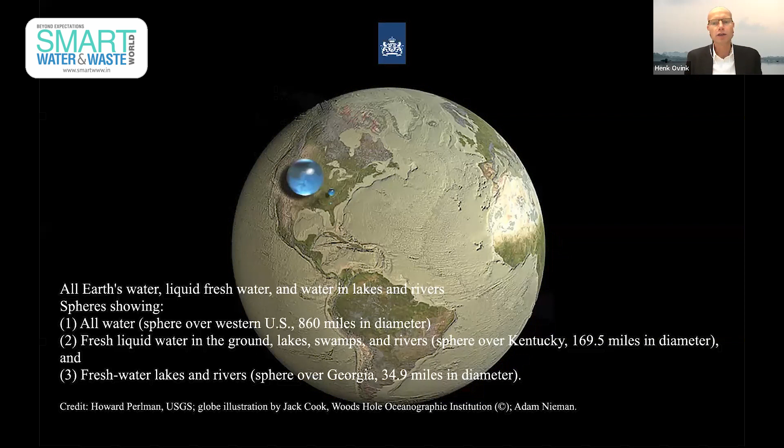Now, water relates to the challenges we face, from disasters—floods, droughts, wildfires—leading to migration patterns that are only increasing across the world. 2019, last year, again, was a year of these disaster events, and we will see more of these examples in the coming years. And in the current pandemic, this is a scheme just taken now, an image of the world where we are. Water is critically important too. Don't we all say, wash your hands?

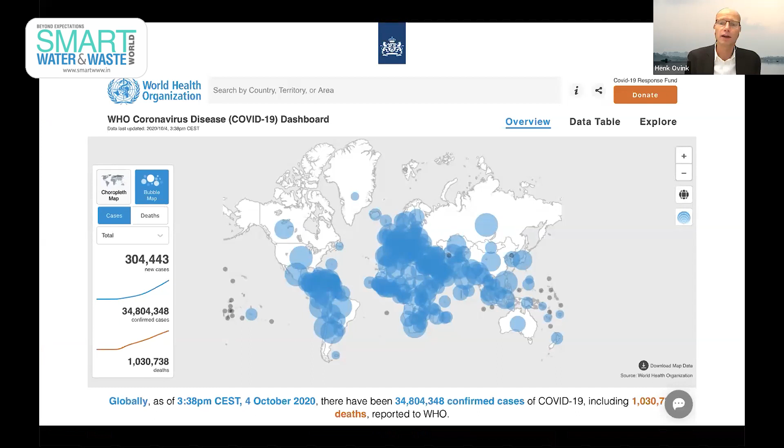Well, for 2.3 billion people in the world, washing your hands because there is no access to safe water is a way out of reach. So health and challenges are all connected to water.

And of course, with water, we think about floods and droughts happening across the world, but only impacting the places that are most vulnerable, and the most vulnerable people in the most vulnerable places hardest. Floods and droughts occur around the world, but the impact on humans is very much concentrated.

So looking ahead at the challenges we face, we only will see an increase. And that means that we have to reinvent ourselves and how we deal with that uncertain future. We can't replicate the mistakes of the past. We have to reinvent that future. Business cases of the past present us with more vulnerability and less sustainability.

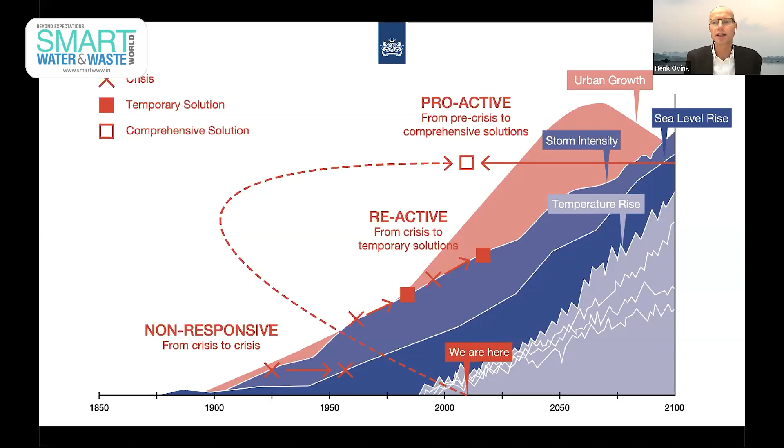And this is why 5 years ago, we agreed upon the Sustainable Development Goals, 17 goals that as a holistic, comprehensive, and connected agenda will help us drive the change we need. We agreed on the Paris Agreement to mitigate climate change and adapt to its challenges, to be able to tackle future challenges - not non-responsive, moving from crisis to crisis, not reactive, fixing with band-aid solutions temporarily, but proactive, like in this conference, finding novel solutions to future challenges by partnering and looking ahead. And water can be a great enabler for those future opportunities.

It is to water that all our challenges are connected. If we look at the Sustainable Development Goals, you'll find a relationship with water in each and every one of those goals. Women and kids that walk the wells - if there is no good drinking water available, health costs go up, mitigating climate risk with heat, nature-based solutions, or preventing floods, affordable and clean energy because of water, and of course food security, and so forth.

So water is connected and therefore an enabler for delivering on the Sustainable Development Goals. But to be able to do that, we have to understand that complexity. And if we understand that complexity, we have to value water across its relationships with all these SDGs. And based on that understanding and a more comprehensive and inclusive way of valuing, we can manage water better at our community scale, at the scale of our cities, our river basins, countries, and transboundary.

But for that, we need to look ahead. We need a research, planning, and design agenda that looks long-term, sustainably, and comprehensively at the future, being connected to short-term and better innovative projects and interventions. So the plan needs projects as much as the projects need the plan. And to be able to do this well, you need collaboration of all partners, public and private, institutional and informal, in a very transparent and accountable way.

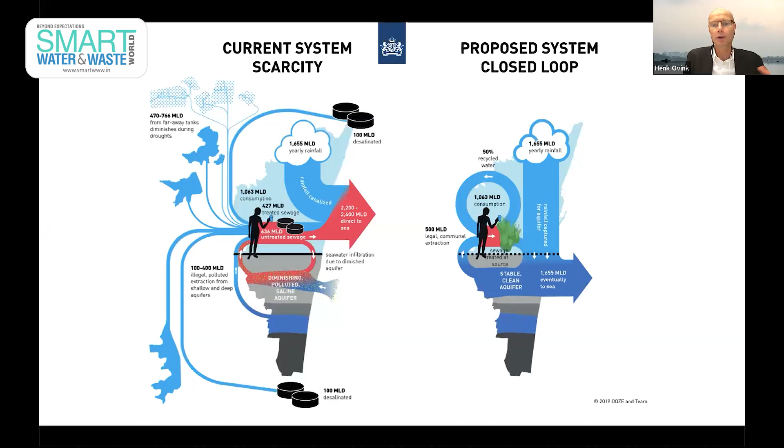We do this Water as Leverage program across Asia - Chennai, of course, as a best example - where we try to change the current water system into a holistic and circular approach that will deliver not only water for all its consumers and businesses, but also restore with nature-based solutions the natural capacity of our aquifers and help clean the water so we don't pollute our rivers and our oceans.

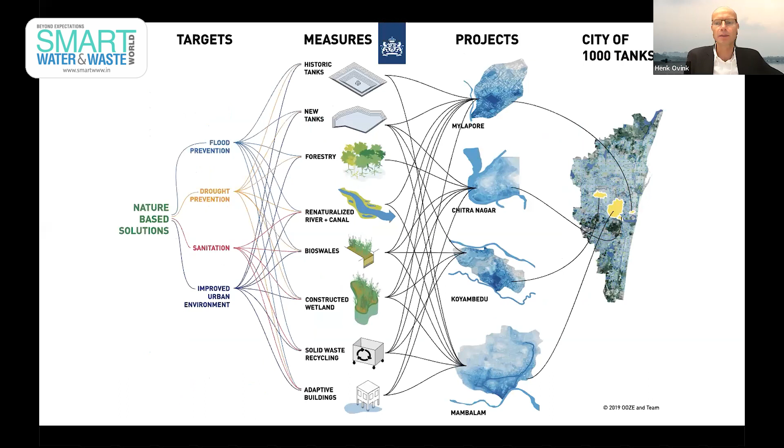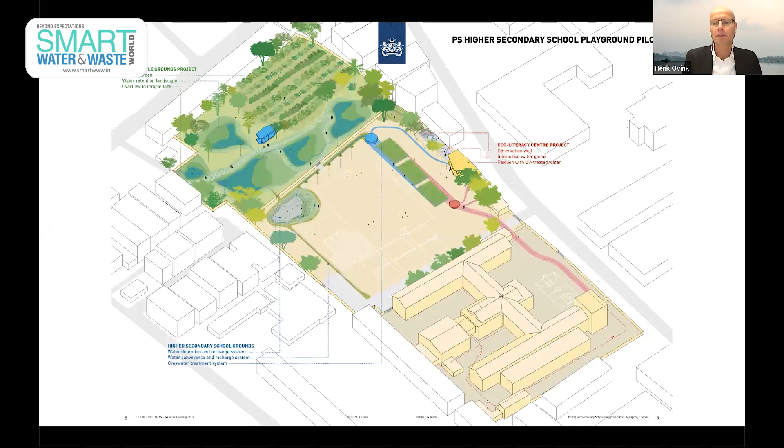Nature-based solutions at all scale in the city of Chennai drive resiliency and climate mitigation, and have the opportunity - not only because they tick all the boxes of the Sustainable Development Goals, but also because we can pilot them from the very small scale up - to drive the city's resiliency with water as a leverage from the bottom up.

We start with a pilot, we scale it up with schools in Chennai, then across India. We do it on the neighborhood scale and then scale it up across Tamil Nadu. It's this replication and scaling up capacity of water as leverage in Chennai that we can bring to India and then to the world to help us deliver on the promise we made with the Sustainable Development Goals and the Paris Agreement. Water as leverage is an innovative approach.

It improves the resiliency of our cities and their communities. It integrates an inclusive process by combining policy, engineering, creativity, and local knowledge. And participating from the start, we're all partners to help us develop partnerships, collaborations that see these projects through all the way to maintenance and operation.

In Chennai, it aligned with our national, bilateral, and global policies, with the Swachh Bharat Clean India mission, with the Jal Shakti Abhiyan, Jal Jeevan mission, with the UN Sustainable Development Goals, and with the Memorandum of Understanding between India and the Netherlands. In collaboration and cooperation with local governments and communities, partnerships like 100 Resilient Cities, the Dutch ministries, the Dutch Enterprise Agency, and international partners from financial institutions to help us deliver on this promise.

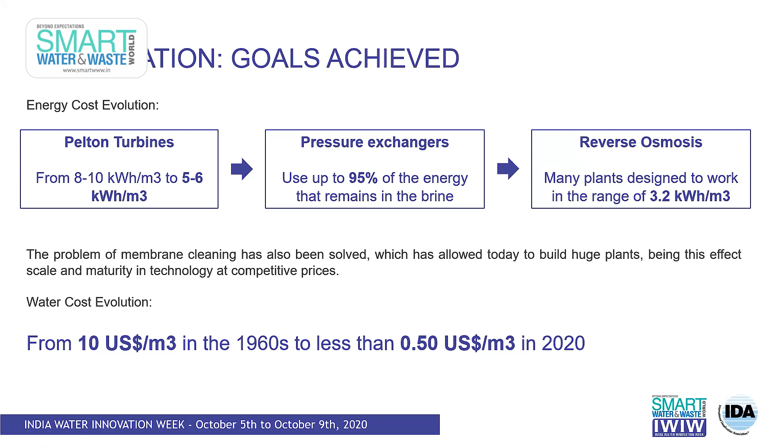We can say that we have practically reduced costs from $10 per cubic meter a day in the 60s to less than $1 nowadays. In fact, we have some record tariffs in complete BOT projects in the Middle East giving us prices lower than $0.50 per cubic meter. So I think desalination has really demonstrated that it is now a commodity, giving very good comfort to the majority of users.

There are more than 21,000 installations worldwide. Total capex invested in 2020 is around 16 billion dollars, with a record capacity in 2020 of 5.4 million cubic meters a day, and a record in total energy demand. Some plants this year have commitments with warranty levels of less than 3.5 kilowatt hours per cubic meter, a clear record. In some cases we've seen 3.2 kilowatt hours per cubic meter. This shows desalination has demonstrated it's an available and affordable technology for the future.

Nowadays the big challenge is how to expand this technology to areas and continents where it has not been the dominant use. Desalination together with reuse are the two unique opportunities to generate new water resources out of the global water cycle in the world.

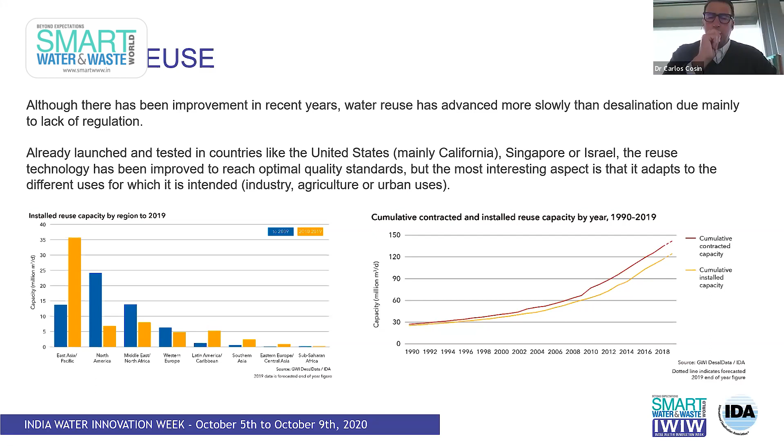Nowadays, following the trend in California, Singapore, and Israel, the European Union has launched a new directive that can now be adopted by the majority of countries. With this new regulatory framework, probably reuse is ready to expand faster than in the past, because the technology is not an issue, the financing is not an issue, and with regulation in place, many countries can adapt it to expand reuse for the main purposes.

This is the installed capacity for the next five years, which means we can probably increase the total capacity by 30 to 35%, which is an important growth. The main areas are well balanced between China, United States, and the rest of the world, but important countries like India are also going to contribute another 8% increase to the current capacity.

Although the majority of reuse has been industrial and agricultural, there are new challenges. Reinjection into aquifers to protect against saltwater intrusion and to create new reservoirs for the future is starting to be one of the big topics for reuse going forward.

As a summary, and I've discussed these ideas with my colleagues, the new challenges in the future for both reuse and desalination are, first, understanding the commodity use of desal in the majority of countries that have demonstrated the scale effect and the level of prices.

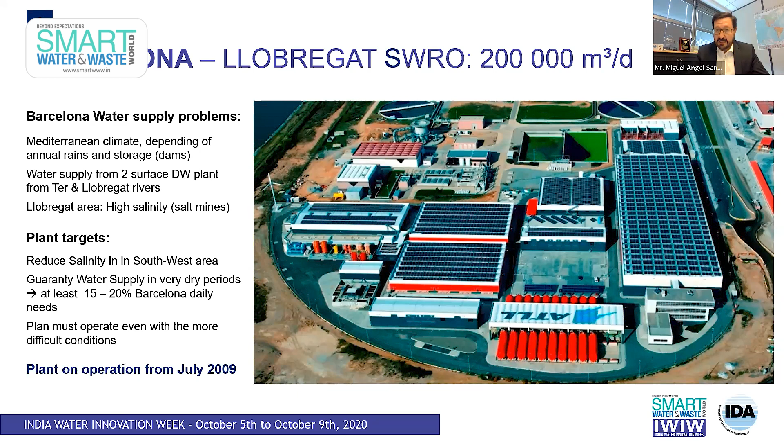Next slide please. The most difficult part is where the plant was built. You can see in the slide, from the left, the Llobregat River was changed course just to build the extension of the new harbor of Barcelona. At the same time, in this area was built one of the second largest wastewater treatment plants of Barcelona city. The area for the extension of the harbor was filled with ground, and that's where the desalination plant was installed.

But taking into account the area where the plant was built: first, the Llobregat River is a Mediterranean river with peaks of turbidity over 10,000, bringing a lot of suspended solids. Second, the risk from the airport. And third, the protected area close to the Barcelona airport and the beaches. So taking into account these conditions, next slide please.

The intake and the brine discharge was a challenge. Finally, it was decided to go with a very deep intake, just to avoid any interference from the harbor or the river, using 2 intakes at 60%, just to ensure the plant will always give water. And we built a very strong pretreatment with 3 steps: DAF flotation, gravity, and pressurized media filter, giving a lot of flexibility within the plant, having 2 streams of 100,000 cubic meters per day.

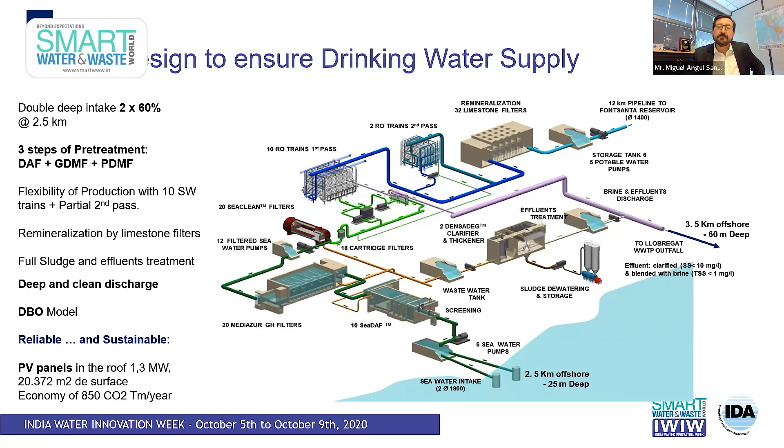The sustainability of this plant is important, even incorporating sludge treatment just to minimize the suspended solids we are discharging to the sea. You can see different pictures of the plant. I think in the bottom right you can see one of the more well-known pictures in the world about a desalination plant — that's the colorful plant of Barcelona.

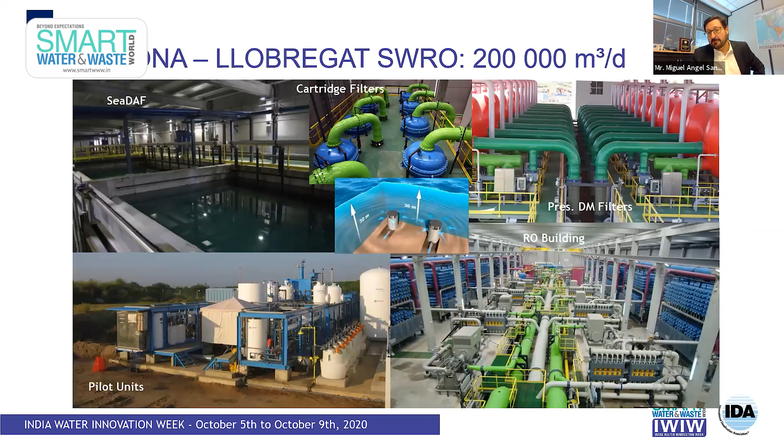We used this plant for 3 years at our research desalination center, because we started piloting before the construction, and it was running even during the period of construction.

The other key point in this plant is the way the discharge is done, using a new disposal method via the outlet of the wastewater treatment plant, blending with the brine at a ratio that, even in the worst case, matches the salinity of the water, optimizing the discharge of the wastewater treatment plant. After more than 10 years of operation, there is no known disturbance in the environment in the area, even at the intake. I think it's one of the more original discharge methods you can use, by co-locating with the wastewater treatment plant.

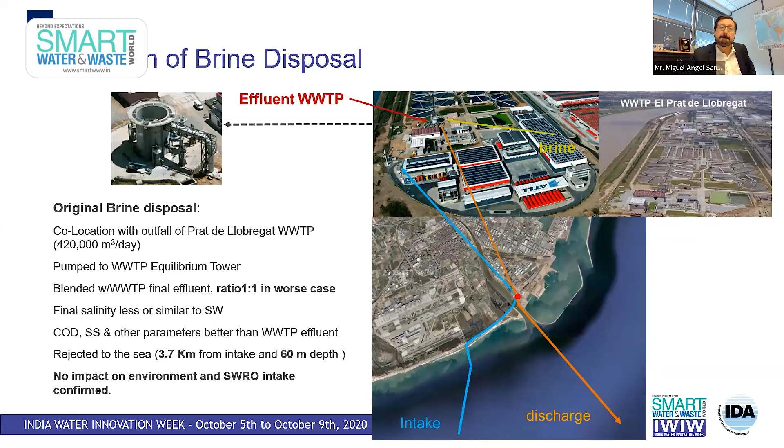The second case goes to Melbourne, Australia, where one of the largest BOT plants in the world was built, for 450,000 cubic meters per day. It was a 30-year BOT, with 3 years of construction and 27 years of operation, made to ensure the water supply to the city of Melbourne, which today has around 6 million inhabitants.

The plant is able, in the most difficult conditions, to supply 50% of the drinking water of Melbourne. It was decided to take very clean water to optimize operational costs, doing only one simple pretreatment step, a dual media filter pressurized with this good quality water. There are 3 streams of 150,000 cubic meters per day, with space reserved to build a new stream to total 600,000 cubic meters per day when the government decides to increase operation.

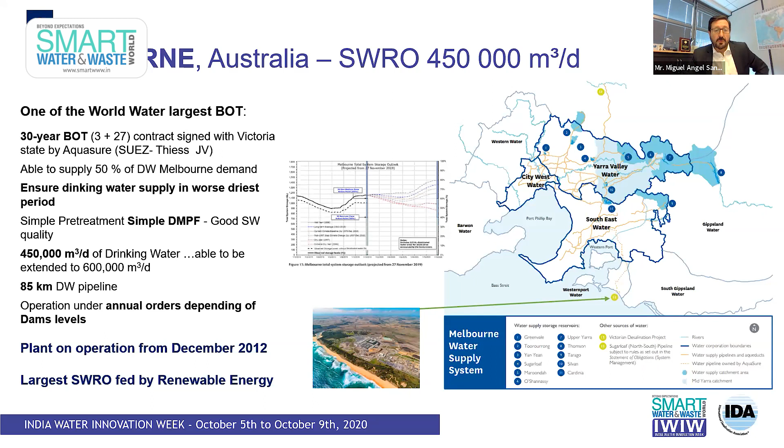The plant is situated south of the city, connected by a pipe over 85 kilometers. The plant is under operation; the commercial operation date was in mid-December 2012. I think it's the first and largest plant in the world totally ensured to be fed by renewable energies.

The intake and discharge were made by tunneling, with a long tunnel of 1.2 kilometers at minus 25 meters depth. You can see the picture during the construction phase, where they went to minus 60 meters to attack the two tunnels.

The brine discharge is separated at an angle, with a length of 1.5 kilometers, going to minus 30 meters, ensuring the distance prevents interference between intake and discharge. This was modeled with extensive studies, both real and by software, to demonstrate there was no interference before construction.

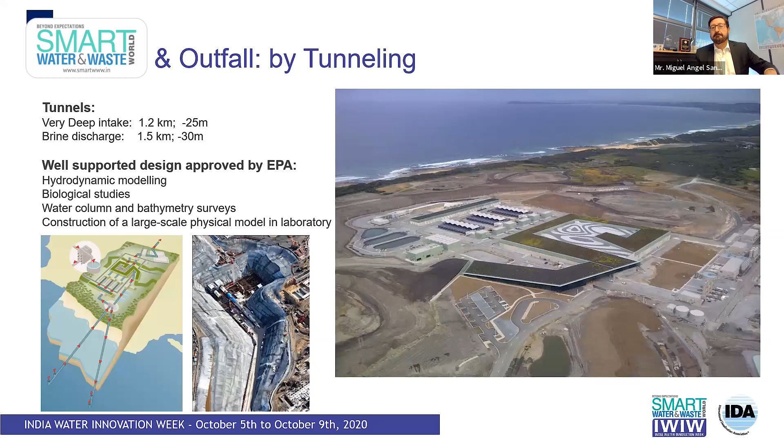The plant is one of the greenest in the world, as you can see in the picture. The treatment is very simple. Also, the sludge treatment, as in Barcelona, was running just to minimize the suspended solids being thrown into the sea.

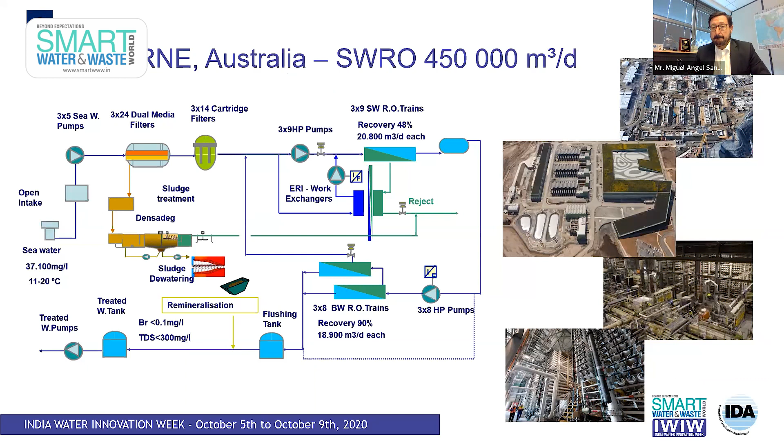The plant is one of the greenest in the world, built on 38 hectares, but with an ecological area of 25 hectares containing over 40,000 plants. The only way to actually see this plant is from the air. If you're on the road or walking around, you don't see the plant because it's dissimulated into the ground.

After Perth, which was the first in Australia fed by renewable energy, this was the second plant in this condition, and it was the largest one. It's totally zero carbon footprint, so there is no impact. This is very special in Australia because it's made through renewable energy certificates.

You have a contract with a producer of green energy, independent of where it comes from. In this case, we made contracts with two wind farms: the Oaklands Hill and the Macarthur Wind Farm, which are able to supply energy to the grid in a higher quantity than the plant consumes in a year. So it's calculated on a yearly basis.

In addition to this green plant, we go to the Middle East, to Oman, for another reliable and sustainable experience. It's the largest Omani plant, with a production of 280,000 cubic meters per day to supply water to the Muscat area. It's another BOT, with 2 years of construction and a 20-year BOT term.

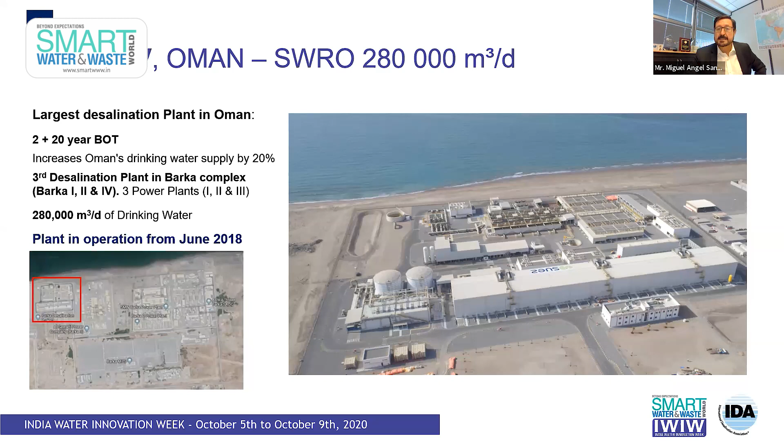The characteristics of this plant take advantage of new technologies, with only 2 pretreatment steps, increasing velocity compared to the previous plant. They have DAF and only one stage of filtration, dealing with very difficult water full of organic matter and, from time to time, algal bloom. This is a security design, as the intake uses 2 pipes at 70% of the flow each, ensuring the plant can run at least at 70% flow.

And the plant is flexible enough to supply water in every condition, having 12 trains and a partial second pass, just to respect all the quality demanded by our customer, the OPWP. There is a limestone filter for remineralization, and as with all the plants we build, there's a sludge treatment, and the energy consumption is very optimized. It's less than 3 kilowatt hours per cubic meter, demonstrated every year in reliability tests, where we have been between 2.8 to 2.9 kilowatt hours per cubic meter.

That's something interesting in this plant. The open intake is cleaned by a pigging system used several times, at least once per year, keeping the plant at full percent production in the flow.

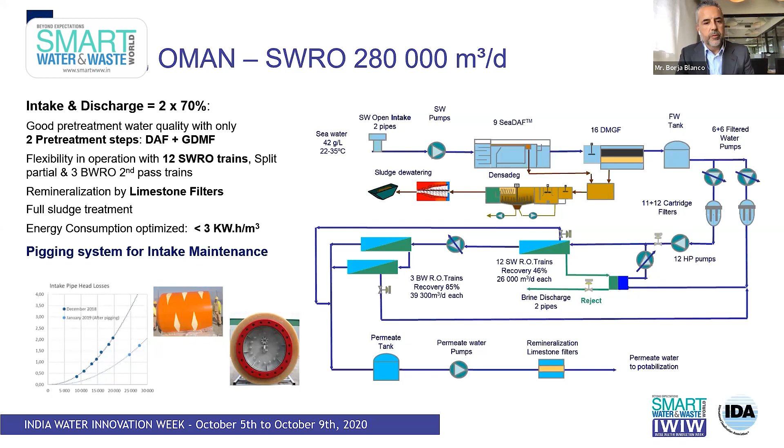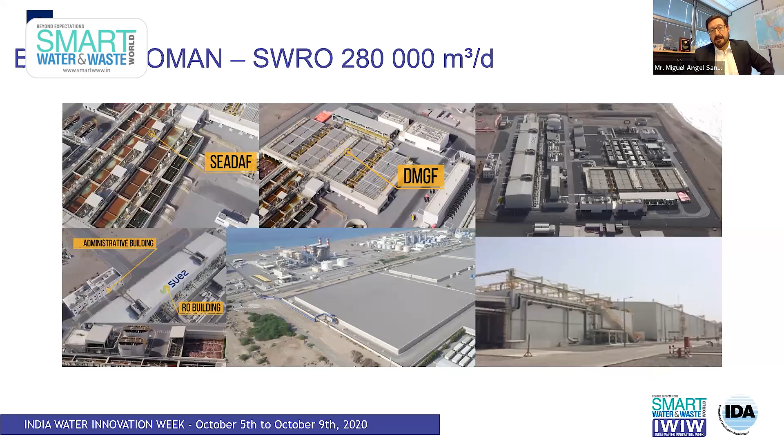Next slide, we're going to have to conclude soon. Yes, sorry, I think this is the last slide. You can see some pictures of the different parts of the Barka desalination plant, the SeaDAF. We are able to be covered in the case of heavy rains, and you can see the dual media filter has a system to cover it, to avoid algae developing inside. Another view of the plant, and even the storage tank for 1 day capacity, giving the plant a lot of autonomy. I think that's all, I hope I've been on time, just showing 3 different experiences with 3 different problems in the world.

Very interesting. Thank you so much.

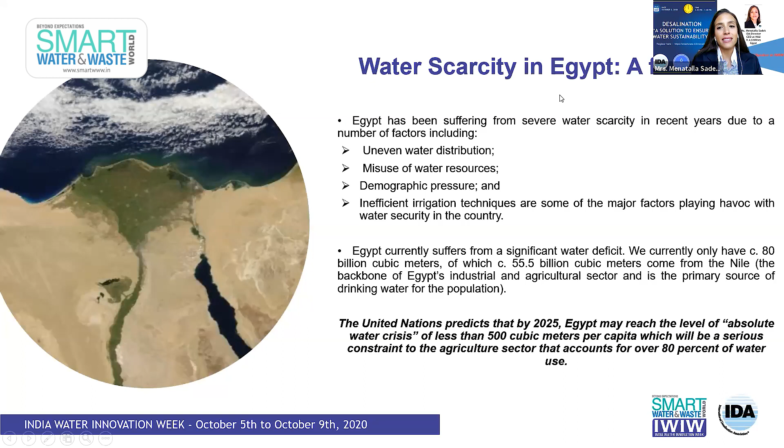If we move on to the next slide, please. So around 70% of our rural communities have no wastewater treatment facilities. There is some $14 billion required in the next few years to invest in the wastewater sector to reach 100% sewage coverage. Over the past, and this was a very interesting figure for me to see, we have had a 75% drop in annual per capita renewable freshwater resources over the past almost 3 decades.

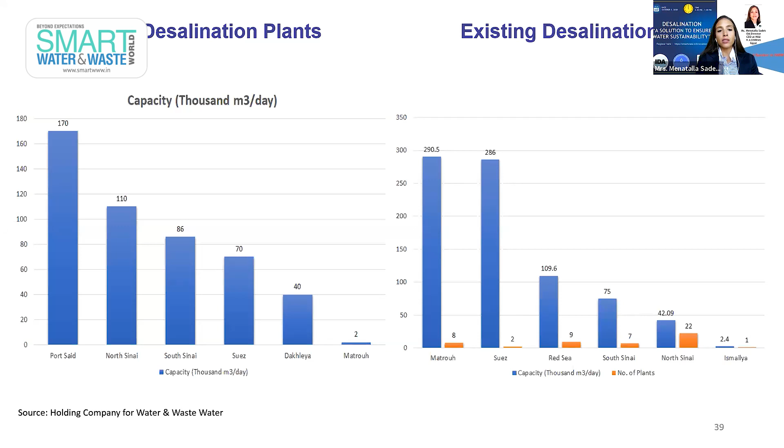So basically, and I think this is the message of the presentation today, the government is planning around 6.5 million cubic meters per day of additional capacity by 2050.

So basically, what I wanted to say today is that there's a big need for us in Egypt to diversify and expand our country's water resources. Desalination is definitely a key focus for us as a country in the coming years. The figures speak for themselves.

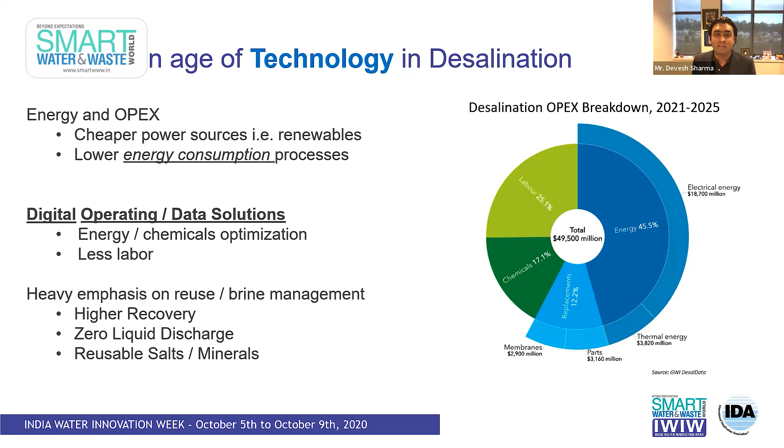We always want to understand, you know, I talked about the cost of treatment. The treatment is clearly trending downward with technological improvement, efficiencies, but is the cost of desal really trending downward? And the answer to that is it's complicated.

It depends. You see Carlsbad, California has a cost of desal, one of the largest plants in the Western Hemisphere, of $1.61 per cubic meter. Some of the more recent projects in the Middle East, in the UAE, Israel, Saudi Arabia, are trending towards 30 cents per cubic meter. And this is the big question that has us scratching our heads: why is the price so different when the technology is by and large the same?

Well, there are issues of cost. There's OpEx costs, CapEx costs of building a plant in the United States, which is more than building a plant in the Middle East. We can't forget the issues of scale. But what I want to bring to everybody's attention is there's also a lot of unexpected costs, hidden costs of desalination.